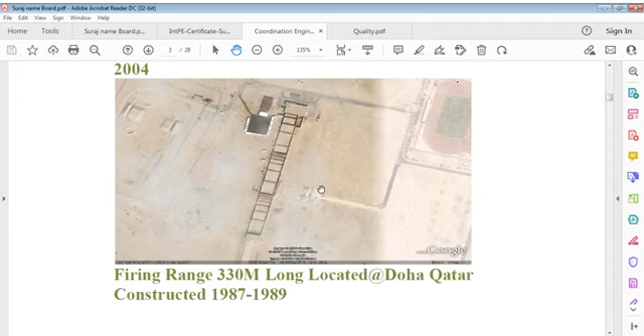This is a firing range or shooting range, about 330 meters long. This is also a very specific project, which I did in 1987. These are all just a few examples I've taken from my experience—I'll add more, but I want to confirm practical aspects rather than just speaking for nothing, because engineering is demonstration.

I'm trying to let you know what I mean when I say coordination—I'm saying that we must have done coordination. Only then can I talk about it.

Otherwise, if I don't do that, there's no meaning in talking, because I'm not doing that work. So what I say on this project, first it should be clear this is an RCC structure with ordinary footings, not deep footings. There were about 300 columns, as I recall. 300 structural columns on these buildings is not a small quantity. There were about 5 or 6 buildings grouped together with one building being a mosque, so 300 columns is practically possible in this case. We can accept that point; this is not a very big figure for this.

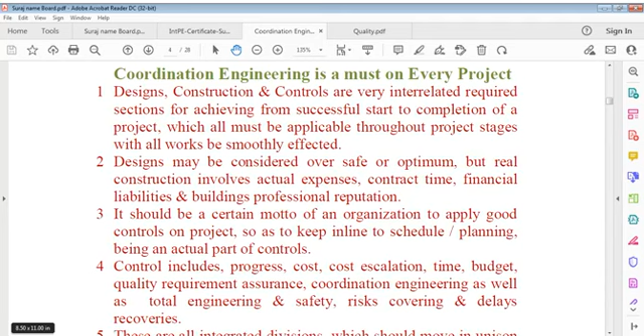We had learned about epoxy flooring also on one project in Doha. We had to learn how epoxy flooring, or epoxy painting on floor, epoxy coating - 1.5 millimeter, 3 millimeter, etc. - are done. I also learned that there, which I'll take up later. I've taken a lot of time on this project demonstration of one building. I would simply say it was good concrete work at that time, and we used to cast full height, and that's our beauty. In Iraq also we used to cast full height.

I did not learn to cast just 1 meter at a time as is usually done here, casting 1 or 2 meters in stages for a column. We did not, without any problem, we cast such columns full height. If you see this building, you can see this tower. We cast it all at one time, full height - big T-shaped columns, L-shaped columns, cross columns, rectangular columns, walls, RCC walls - full height of 4 meters without any problem. It's quite good, not an ordinary way, especially compared to those days.

This was in 86 or 87 or 82. In 82, I dealt with concrete pumps, not mobile pumps, though mobile pumps were available - we used reciprocating stationary pumps and batching plants also. Many additives were used in concrete that day, which I had never experienced before in this country. I learned pumps from Iraq, though I did not use pumps in Libya, but they were available there.

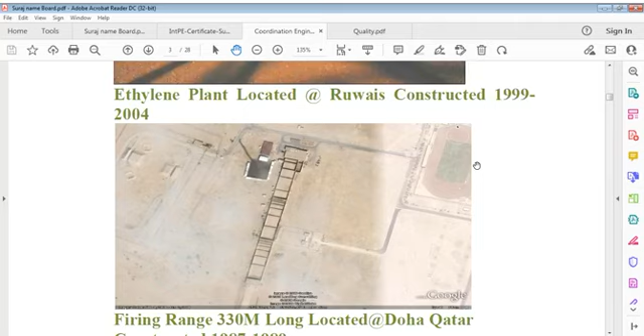So I have taken this file, I close it now for reference only. So what do you understand by that, you think? Now I've shown you that.

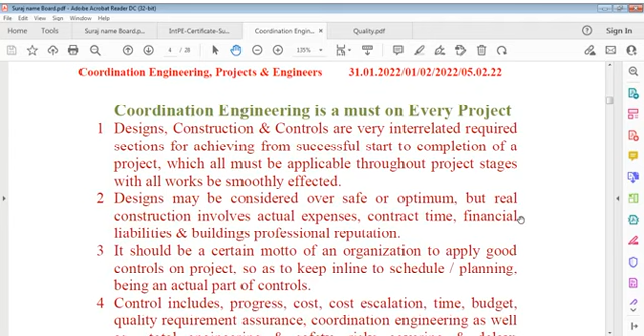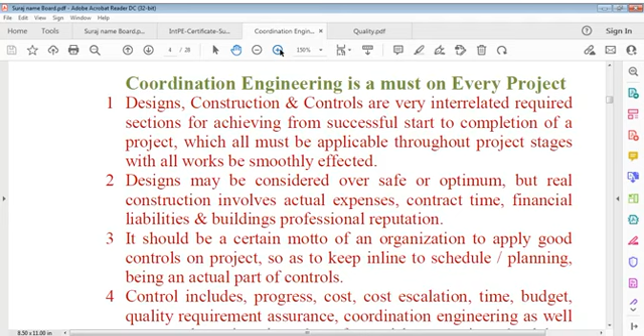Now what I'm going to say is that what's important is your concentration, my concentration, in what we are going to do. And that's why I say coordination engineering is very important from this point of view. Whatever you do, you have to coordinate. These sketches will show you again and again. Now what I'm trying to show here is, as I said, it's more than I should reduce it, I think it's reducible. Coordination engineering must be on every project, that's what it says. I did this before also, but I repeat it because it's important from every viewpoint.

It says that coordination is a must for every project. You can say designs, construction and controls are very interrelated requirements for every project. Starting from designs itself, we enter the project world. It's not learning design, it's working design. We are going to do designs for projects which you have to do. And when designs are involved, construction is going to be involved, and if construction is involved, controls are going to be involved. That's very much important.

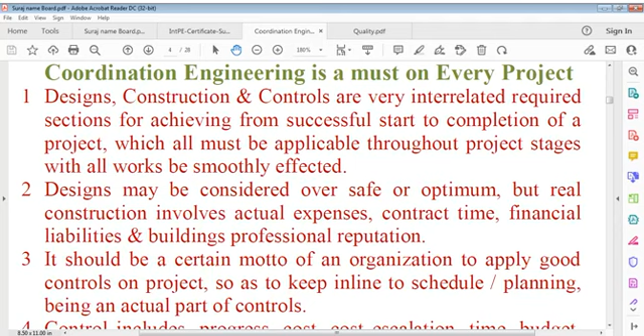Therefore, we can say designs come into play, and designs lead to construction, and construction leads to operation. These are a chain, you can say. We have to consider design over safe or optimum, but construction answers every question. Construction answers what you have decided, what you have done. So what I say is, everybody wants to make money, everybody wants to earn, but the important part is in construction we have to consider everything. And these points we have already given to you.

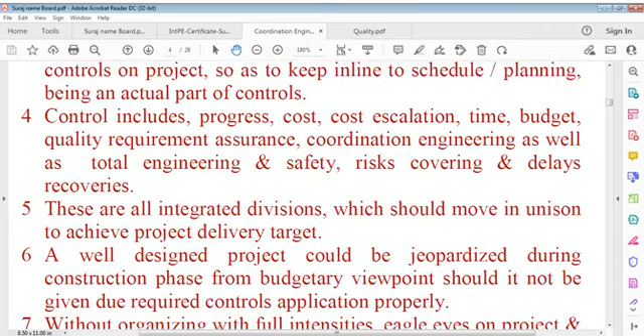I don't know, read again and again. And as I said, there are certain points here, like the introduction note we have taken, and I discussed this with you last time also. So I'll go now in a different way.

If you see point 11 and point 10, you can say an analysis tool can be required to operate with complete dedication to carry out or conduct controls. Analysis tool is a very important tool. It's not a physical tool, it's a mind tool. It's a mind tool, and that tool is very powerful because mind is powerful. We have to be very specific about that. Mind tool, we cannot go without that.

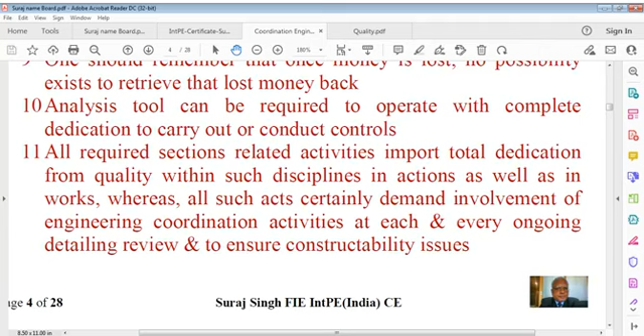All required sections, related activities, import total dedication from quality viewpoint within such disciplines, in actions as well as in works, whereas all such acts certainly demand involvement of engineering coordination activities at each and every ongoing detailing review, and to ensure constructability issues. It's also a very important part that we have to deliberate, you can say, constructability.

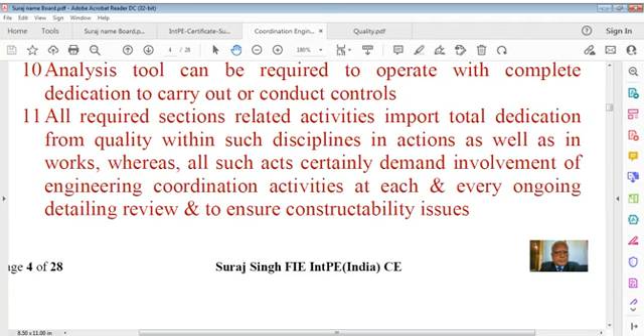And if you go further, it can be plainly said that engineering coordination is the only formula to reach workable, consistent and competent solutions, to achieve successful performance of every activity, every activity to be conducted to avoid possible delays.

And these are just, you can say, guide talks. So I'm going to minute deliberation, minute deliberation, you can say. Minute I am using because I want to enter into some details also when we talk about coordination.

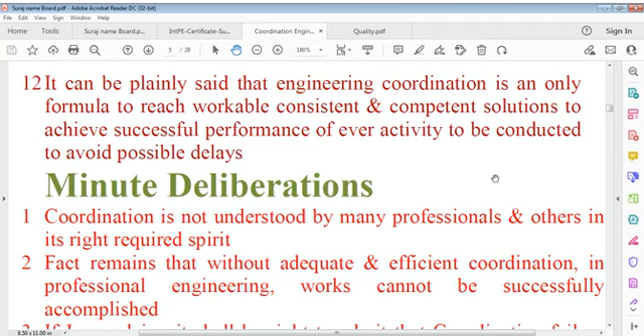Coordination cannot be defined with an easy statement. It varies from project to project, component to component, and from standard drawings to means. It depends on the smart attitude of the engineer who designs, how much coordination is already done or not done, and that's important from a construction viewpoint. Construction doesn't mean just design, it means everything we do must be linked together. There are softwares available, but the one software that you and I have is natural, and that's very important from every point of view. That's why it's really important to understand this, and if we don't, we miss a lot. So I'm talking about minute deliberations.

Minute deliberation is something we have to be careful about. For deliberation we are talking about something logical, something very specific that we have to address in a way we have to do it. We can't do otherwise, it's not possible. Administration is something else, and we are not talking about administration, we are talking about coordination. Coordination is very important from every viewpoint. If we can't coordinate, we can't do anything, we can't say anything. It's a very important point we have to be careful about.

You may say it's my instinct, or my soul, that forces me to understand what I mean about quality and what I mean about something else. I consider coordination more important than quality, because without coordination we cannot do anything. Actually, if you sleep, you cannot coordinate. Coordination is that—if we sleep we cannot coordinate at all.

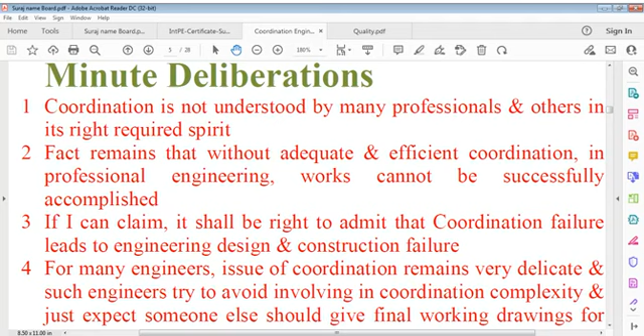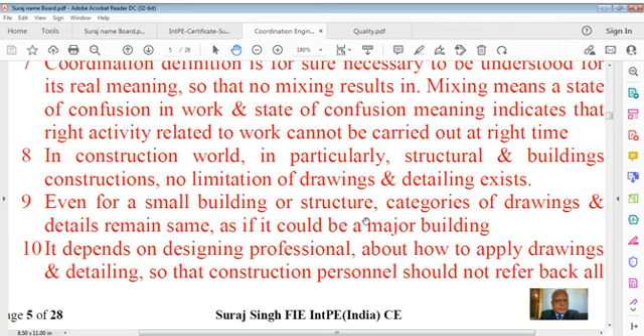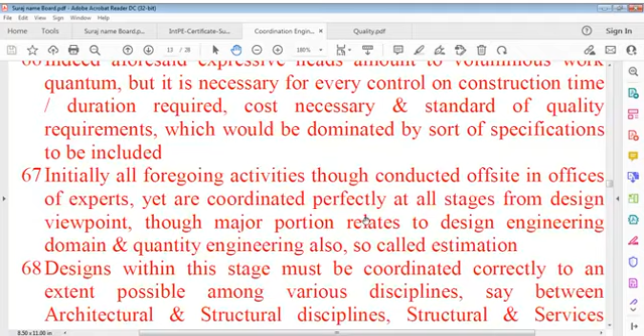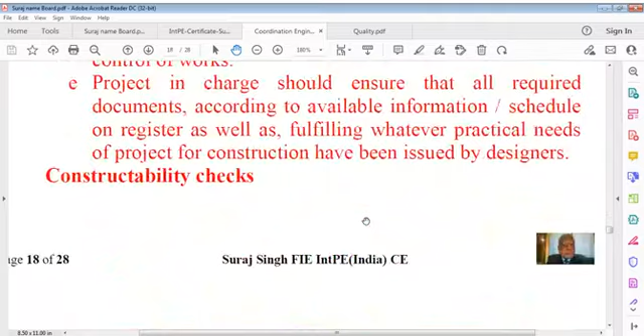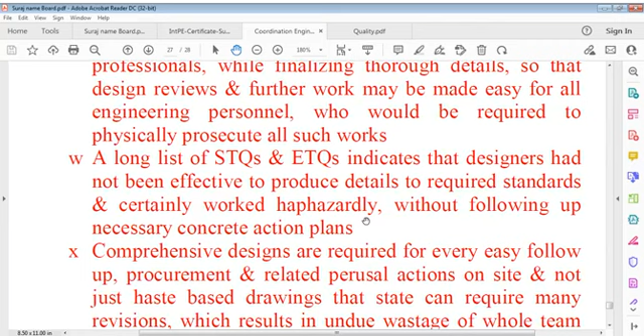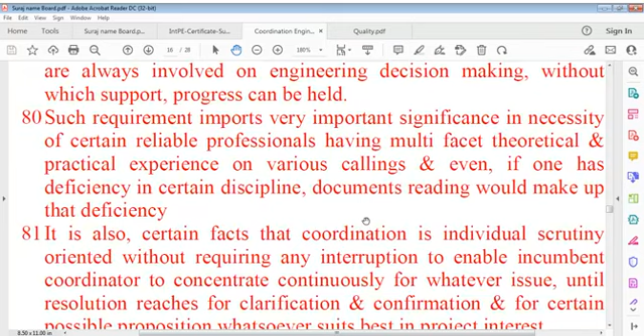So this is up to 28 pages only now. Now only this page. And we were somewhere on page point 50, I remember. Oh, sorry.

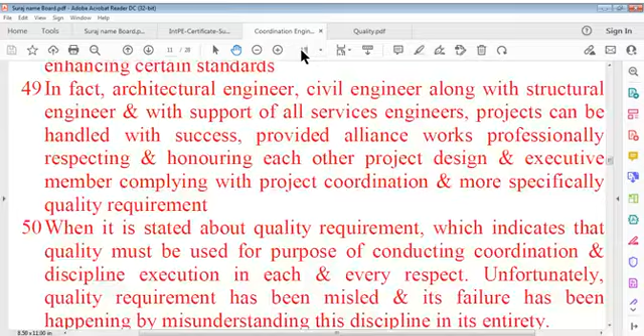Let's start with this point. First let us review this, and then we say what to do otherwise, because other points we will take later on also. So we start with this. When it is stated about quality requirement, it indicates that quality must be used for purpose of conducting coordination.

Quality must be used for conducting coordination. It is something different, and discipline, what we say here, you can say something here. Unfortunately, we can say quality requirement has been misled. Of course it has been misled. Its failure has been happening by misunderstanding this discipline in its entirety, you can say that.

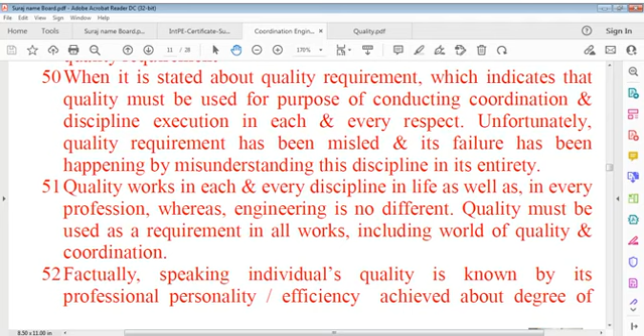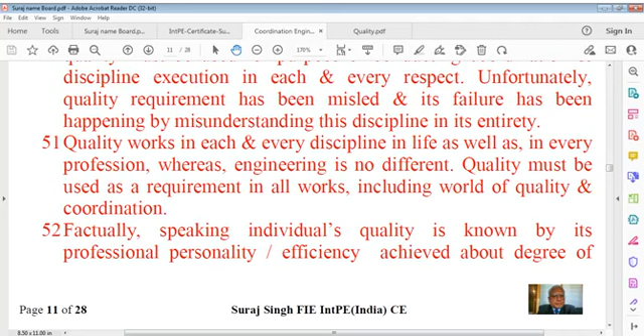Factually speaking, individual's quality is known by its professional personality, efficiency achieved about degree of work or production, quality one possesses, and then further assessment can be calculated or charted out to know its level of work and specifically coordination competency attained by individual professional. No way exists that quality can be achieved proficiently without working on expert coordination.

For doing right work, first time. We may say no way exists, or before that we can say, just a minute, let me finish this paragraph, it's missing, let us see if I missed something.

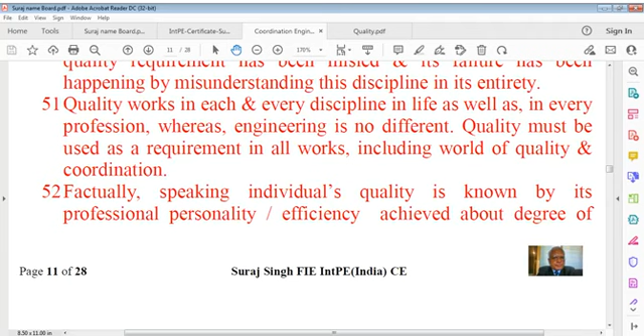Factually speaking, individual's quality is known by its professional personality, efficiency achieved about degree of work or production, quality one possesses, and then further assessment can be calculated on, charted out to know its level of work and specifically coordination competency attained by individual personnel. No way exists that quality can be achieved proficiently without working on expert coordination for doing right work, first time, every time, and controlling use of every and every

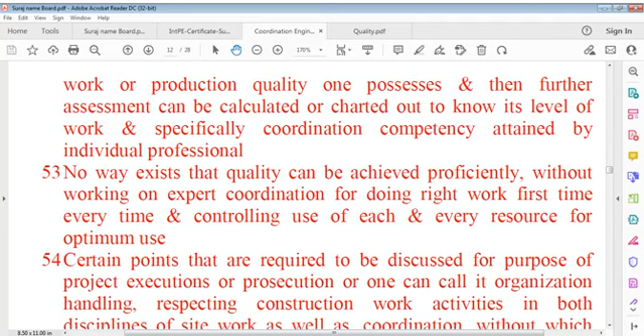Certain points are required to be discussed for purpose of project execution, or prosecution, one can call it organization handling, respecting construction work activities in both disciplines of site work as well as coordination, without which works cannot be completed in each and all respects.

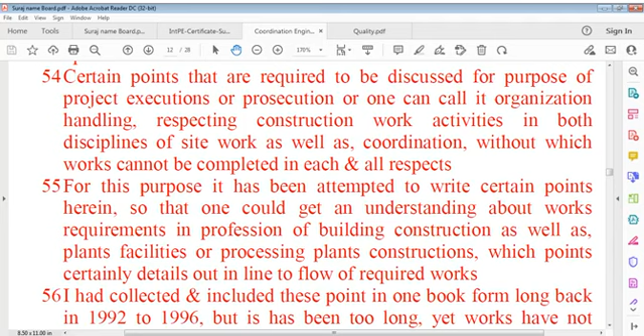I collected and included these points in one book form long back, in 92, 96. It has been too long. The works have not changed in terms of quality and coordination, despite availability of the digital world everywhere.

Let's consider these points given below, following points and activities at certain works to be carried out on sites and elsewhere. We can classify this, these points are very important, into certain classes or stages of project working.

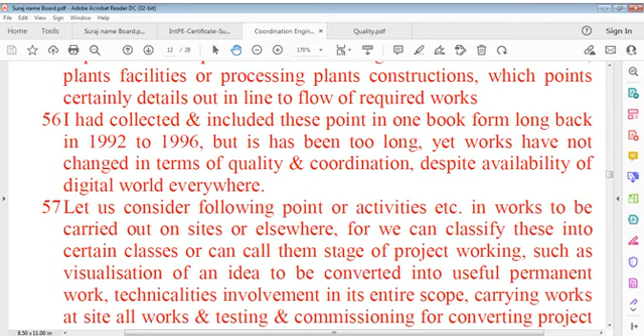Visualization of an idea is to be converted into useful permanent work. Technicalities involvement in its entire scope, carrying works at site, all works, and in testing and commissioning, for converting projects into an operational unit or acquisition line unit.

Foregoing prefaced points are required to be exploded into a world of explanation in various heads and subheads, working out comprehensive designs for project in each and every respect.

Designs include architectural details, structural details, service details, internal and external landscape and utilities. These are generally common, very common.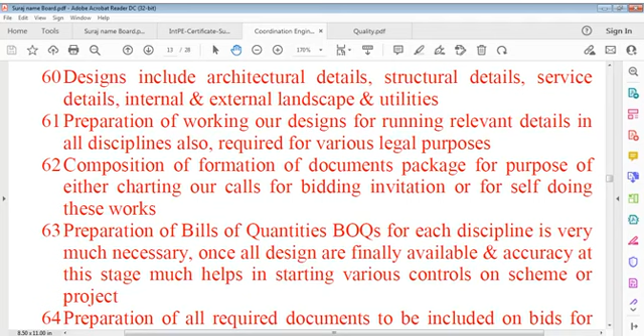Preparation of all required documents to be included in bids allows construction experts to work out their respective practice price to implement the project to success.

Among the above, structural parts of documents and finishes part of architectural as well as other activities dominate cost factors, that can be marginalized by BOQ and decided, required and demanded specifications pertinent to all disciplines involved.

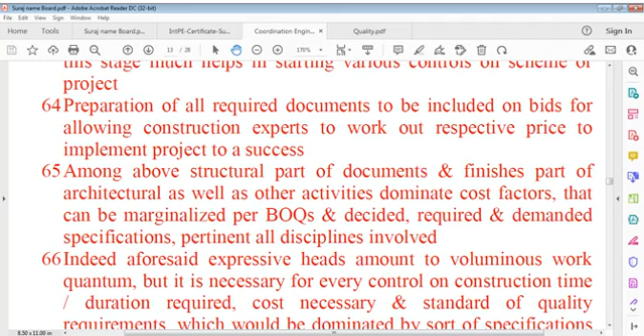Indeed, aforesaid expressive heads amount to a voluminous work quantum, but it is necessary for every control on construction time, duration period required, cost necessary, and standard of quality requirements which could be dominated by the sort of specification to be included.

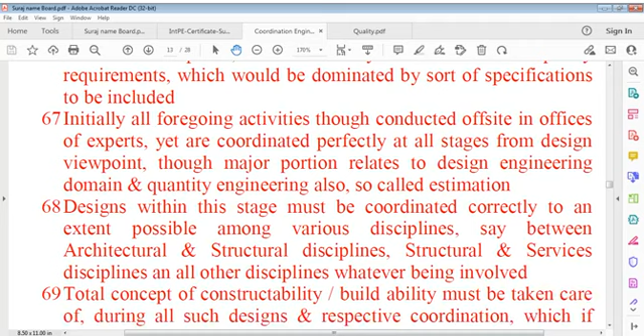We require architectural details completely, and that point must be clear. We also require structural details integral. We cannot say otherwise. Architectural details means these should be clear, very clear without any ambiguity. We cannot simply think that it's fine. We have to think that it is worth working, not fine alone.

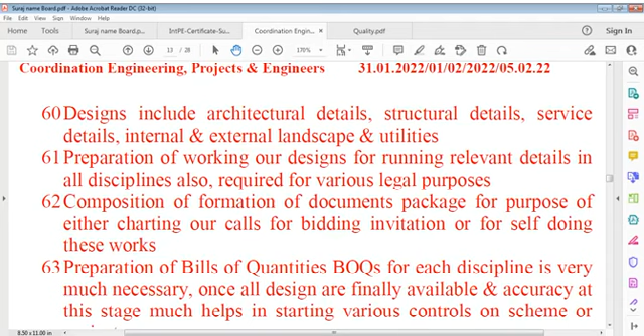Now, preparation of bills of quantities for each discipline is very much necessary. Once all designs are finally available, whatever the accuracy at this stage, that accuracy much helps in starting various controls on the scheme or project.

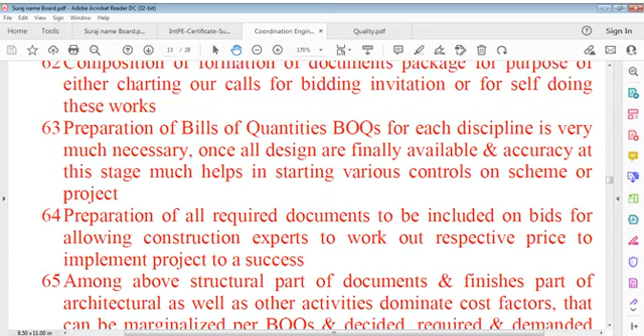Preparation of all required documents to be included in bids for allowing construction experts to work out respective prices to implement the project to a success.

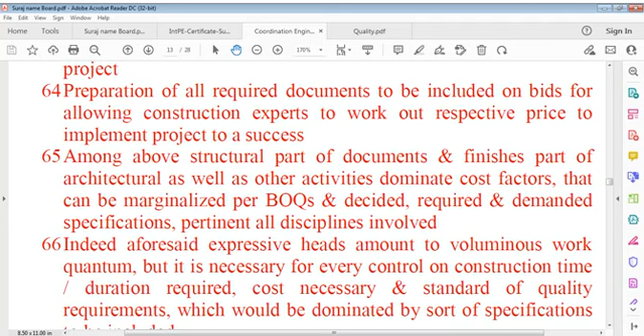Indeed, these expressive heads amount to voluminous work quantum, but it is necessary. It is necessary for every control on construction time, duration required, cost necessary, and standard of quality requirements. It should be dominated by sort of specifications to be included.

Initially, all foregoing activities, though conducted off-site in offices of experts, the major portion relates to design engineering domain and quantity engineering, also called estimation.

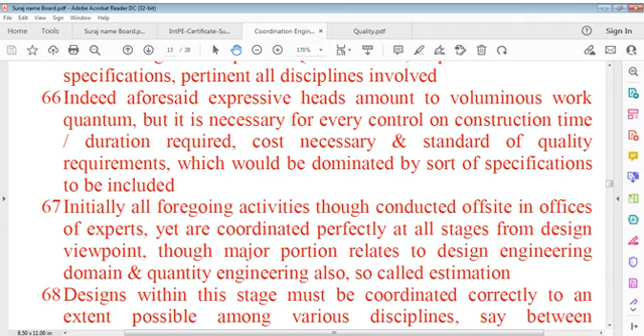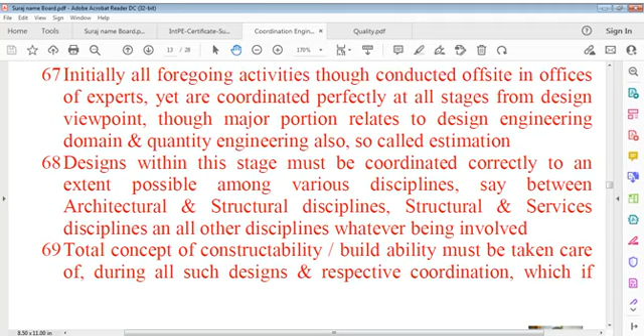Designs within this stage must be coordinated correctly to an extent possible among various disciplines, say between architectural and structural disciplines, structural and services disciplines, and all other disciplines that are being involved.

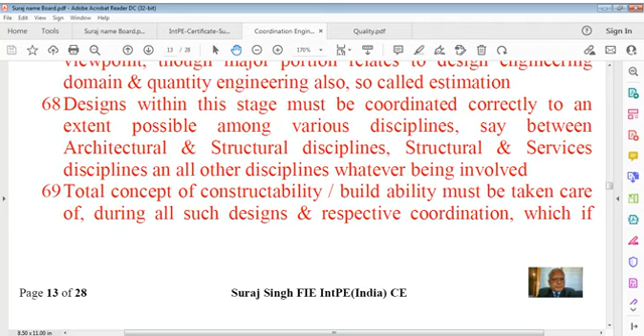Total concept of constructability. Buildability must be taken care of during all such designs and respective coordination. All such designs and respective coordination, if ignored, would mar smooth execution possibility of project work, resulting in certain delays on completion time.

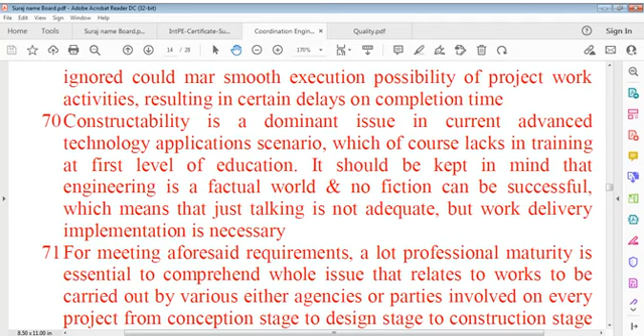Constructability is a dominant issue in current advanced technology application scenarios, which of course lacks training at the first level of education. It should be kept in mind that engineering is a factual world and no fiction can be successful, which means that just talking is not adequate, but work, delivery, implementation is necessary.

For meeting aforesaid requirements, a lot of professional maturity is essential to comprehend the whole issue that relates to works to be carried out by various agencies or parties involved on every project, from conceptual stage to design stage to construction stage, and then finally to delivery stage.

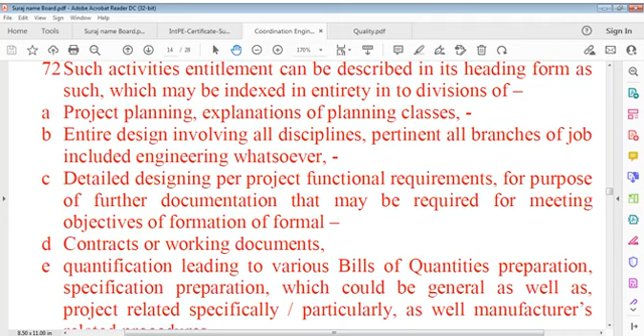In fact, project planning, explanations of planning classes. You may say you have to plan something, you have to explain that. What do you plan? A plan doesn't mean scheduling here, I mean to say. We have to plan in a gross way. It's a different type of plan.

Project plan, not activities based, a different one. We may say project planning, entire design involving all disciplines. That is the first requirement. After project is accepted, when budget is available, we have to say entire design involving all disciplines, pertinent to all branches of the job, including engineering whatsoever.

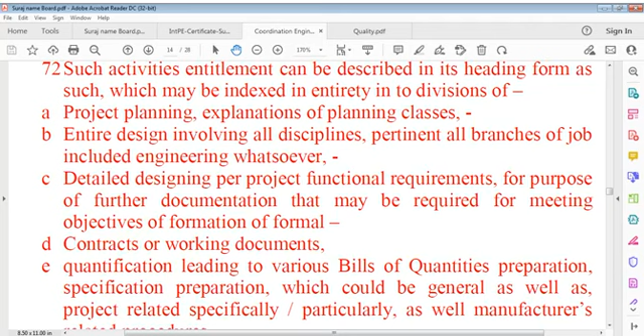Detailed designing per project function requirements or purpose of furthering documentation that may be required for meeting objectives of formation of formal contracts and working documents. These designs, whatever we do, have to be converted into certain documents which speak for themselves - contracts or working documents for purpose of contract.

Quantification leading to various bills of quantities - that process you can say is quantification, which leads to formation of various bills of quantities, preparation, specification preparation, which could be general as well as project related specifically, particularly as well manufacturers related procedures.

Likewise, we can say processing comprehensive package of bidding documents. Shortlisting possible project related experienced bidders. Processing entire bidding leading to selection of contractor after having conducted thorough scrutiny of received bid documents, pass through professional competition.

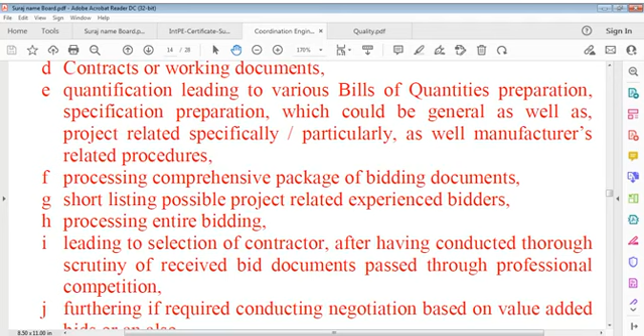Furthering, if required, conducting negotiations based on value added bids or also received alternative bids. Formal declaration of appointment of contractor, which could be either in construction status or in EPC status, depending on requirement.

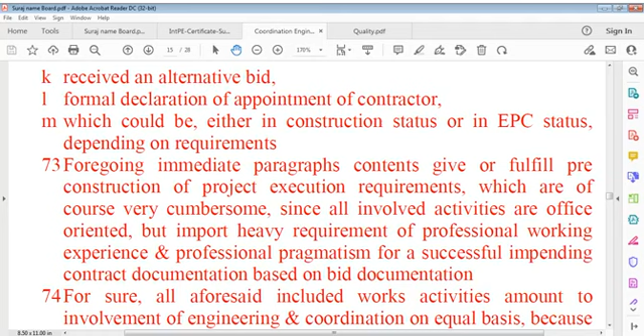These foregoing paragraphs I refer to contents that fulfill pre-construction project execution requirements, which are of course very cumbersome, since all involved activities are office oriented but import a heavy requirement of professional working experience and professional pragmatism for a successful impending contract documentation based on bid documentation.

Here we can say we are concentrating or focusing on the very initial stages of project policy decisions - who has to do what and who shall lead what. That point really is very important for the future of that project.

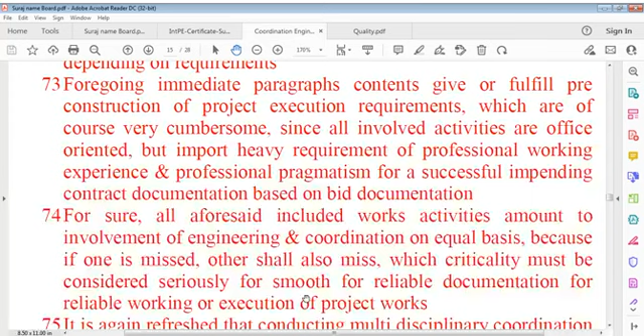And if we miss this point in our work, in our strategy, though it's at a higher level of the project, it's not at a lower level. It is something that at a very junior stage of the profession we may not imagine, but it is very important in every respect. We cannot miss that. We cannot afford to miss that. It's a very important point in our profession. We have to care about that.